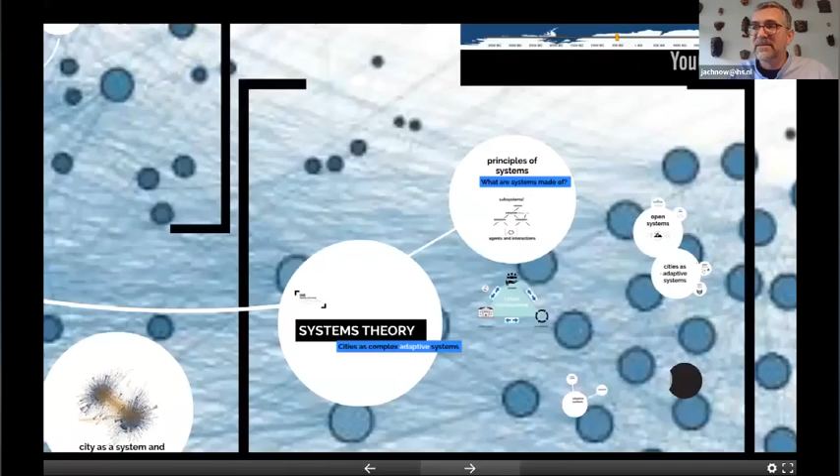So if you think about development from the perspective of what Mohanty was asking for, of having values, institutions, and processes working with each other and having an interaction with each other, you have to first state that there is a multitude of institutions. So maybe not each and every institution at this moment is able to respond, which makes it more difficult to prioritize or to have our actions clearly outlined, and more even in terms of values and our policy interventions.

We have now, and this is the only moment when we can really discuss this openly, to decide which one is more important. We've seen that economic growth has been prioritized over green development, green infrastructure, ecological and environmental features in the city. Now we have to see if economic growth even outweighs the importance of social values. If this would be the fact, we would have a severe problem.

But maybe we can state that now, when social development is at stake versus environmental issues, resilience issues, which one do we give preference? Is humanity really free of being environmental bound? Can we be without nature? No, we cannot. So I think the only way to get this balance right is to think about nature, environmental, and resilient features have to be more important to us than economic features, while social development and social features are on top of it. They are integrative to our...

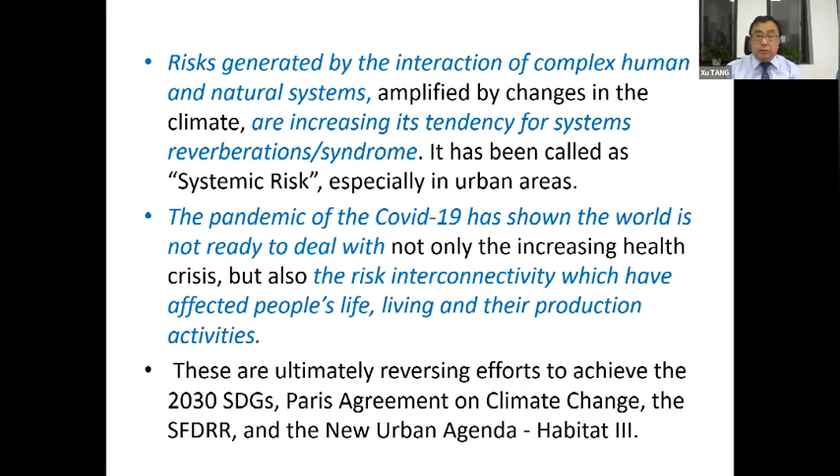However, the COVID-19 pandemic has shown the world is not ready to deal with such risk interconnectivity, which have affected people's life, living, and production activity. You can also find the second wave of the pandemic happened, showing the ineffective dealing with this sort of risk interconnectivity.

So what does the resilient city look like, especially in a new era? I think it might be appropriate for both physical and virtual infrastructure and capacity to be more prepared for the physical, social, and economic challenges in the city.

To address this challenge, it calls for urban readiness on a systematic level - reverberations, I call this a syndrome of risk interconnectivity - and an adaptation and emergency response. We call it a climate emergency right now.

Here are some points for building urban resilience, not limited to what I will mention, including science-based, sustained, and integrated urban service approaches. In order to save time, I will provide more detailed description in a summary part about some points here.

But I will mostly focus on some best practices and experience already being developed and implemented at a global level, national level, and community level.

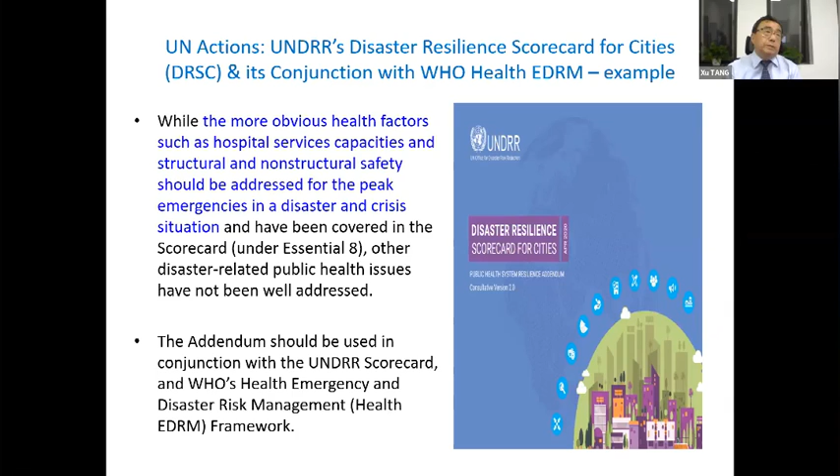For example, as the UN action call for integrated sustained planning for urban health requested by WHO, World Health Organization. And also UNDRR developed a disaster resilience scorecard for cities together with WHO, especially its health emergency disaster risk management component.

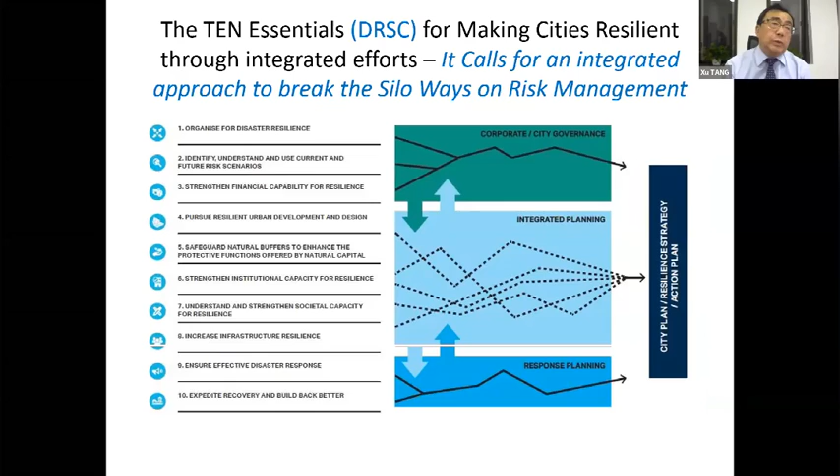So this disaster resilience scorecard for cities calls for an integrated approach to break silos in risk management, including, especially, the component of corporate city governance, integrated planning, and response planning, etc.

Other achievements or progress made by international efforts include, for example, the International Network for Multi-Hazard Early Warning Systems, supported by 21 international organizations, established in March 2015 during the Third World Conference on Disaster Risk Reduction in Sendai, Japan. This network is a sort of global framework which can provide support to guide the development and implementation of integrated urban services, as an example.

Regarding the health effects of climate change, which have already been fully identified by IPCC through its assessment report, especially its fourth assessment report, chapter 8, health related.

The science-based service related to weather and environmental sensitive disease and its vulnerability has been identified, and also the tools and systems have been developed at global level, regional level, and national level.

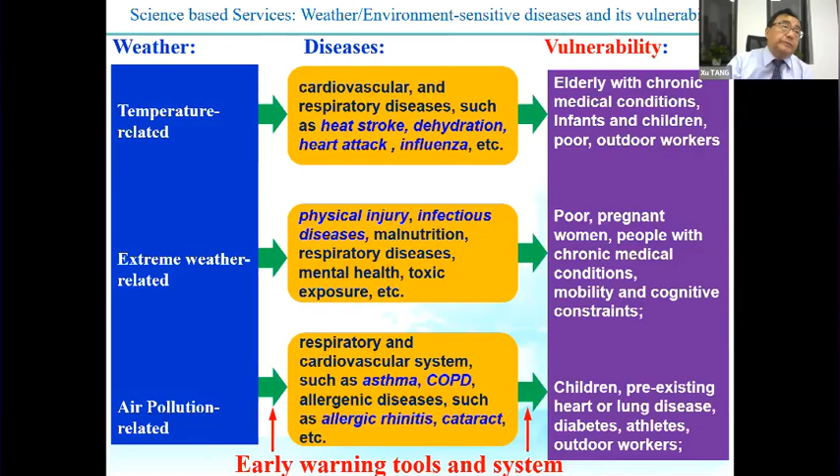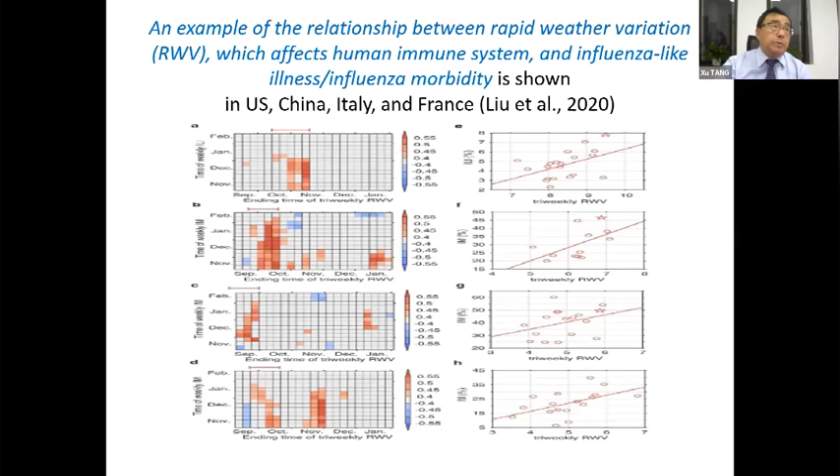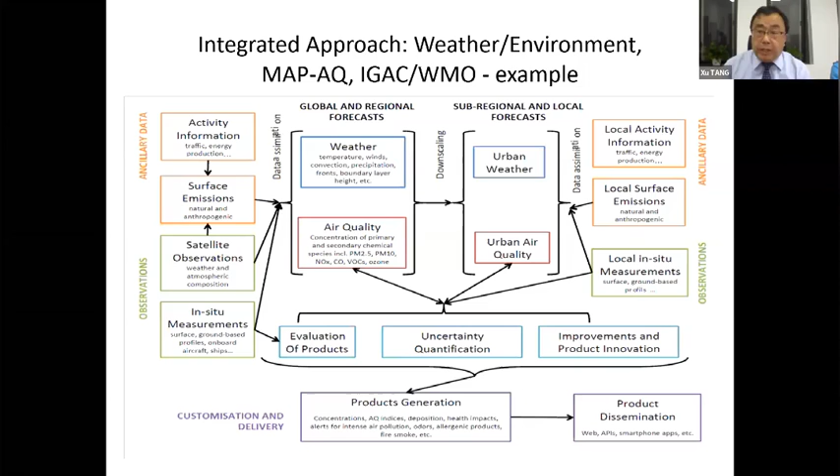Integrated approaches have been developed and demonstrated by relevant international programs, such as weather and environmental related impact-based forecasting and integrated services developed by MAP-AQ and IGAC as an example, and also integrated perspective approaches developed by several international organizations for the driver to societal impact on climate and health.

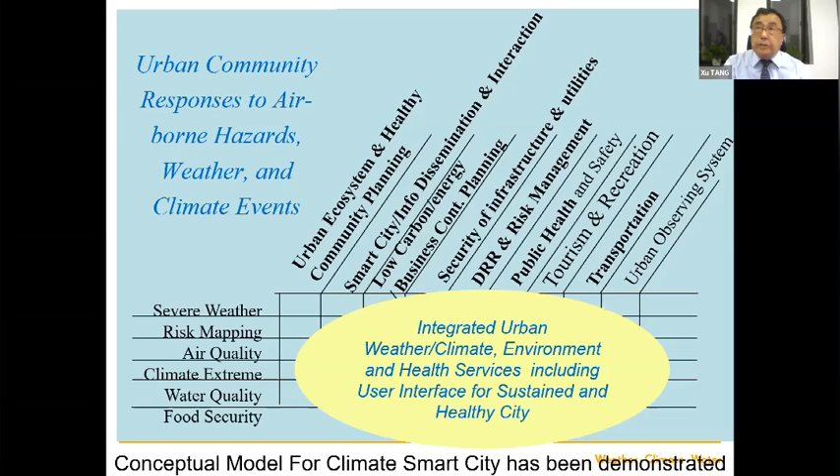So the conceptual model for climate smart city has been demonstrated, including user interface for sustained and healthy city. This concept model has already been implemented at the global level by different international programs and at the national level.

The user interface platform has developed a global framework on climate services at the global level, regional level, and national level, which has been identified and demonstrated.

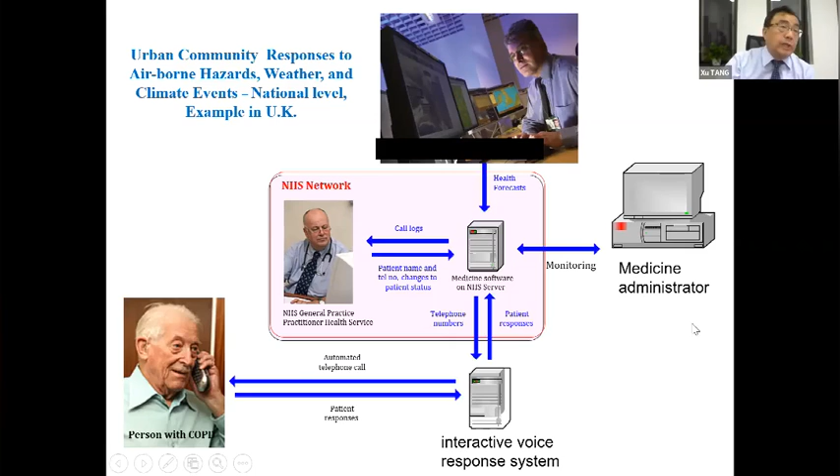Here's one example to show at the national level, using the UK as an example, showing urban community response to airborne hazards and weather climate events, demonstrating joint efforts between the National Weather Service and the National Health Service Authority to interact with vulnerable groups.

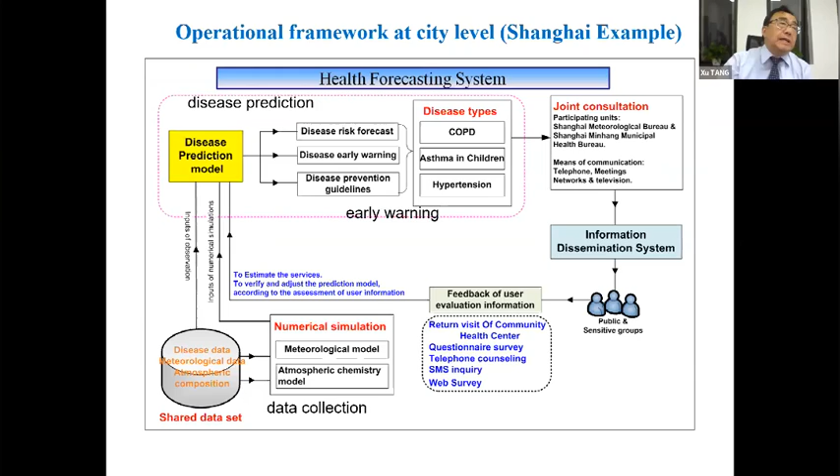The operational framework at city level, using Shanghai as an example, developed an integrated impact-based forecasting system, and its subsystem to show the impact on health.

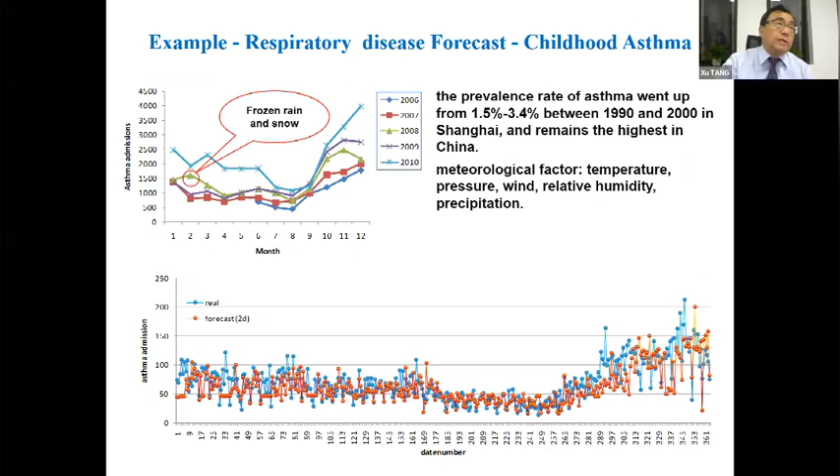For example, heat waves, influenza forecasting, children's asthma, the impact to forecasting, and COPD for the elder group, and bacterial food poisoning warning systems and tools. Capacity development and symposiums have been regularly organized to exchange ideas and achievements.

So here's the summary. At the policy level, I think it's necessary to develop a policy on planning and designing for controlling urban scale and population density.

Alexander just pointed this out in his previous introduction, and a policy for urban redundancy and flexibility and durability of the urban life safety and critical infrastructure system.

And also the intercity co-design and co-planning for coordinated action are needed. The policy on enhancing effectiveness, efficiency, and safety of the urban technical and industrial system and process are also needed to increase urban energy efficiency and reduce urban environmental footprint.

And also the policy on promoting sustained urban healthy lifestyle and prioritizing walking as the preferred mode of travel, and a strong risk settlement mechanism for the most vulnerable group are also needed. Regarding the technical aspects, I think it's necessary to develop a strong digital networking supporting

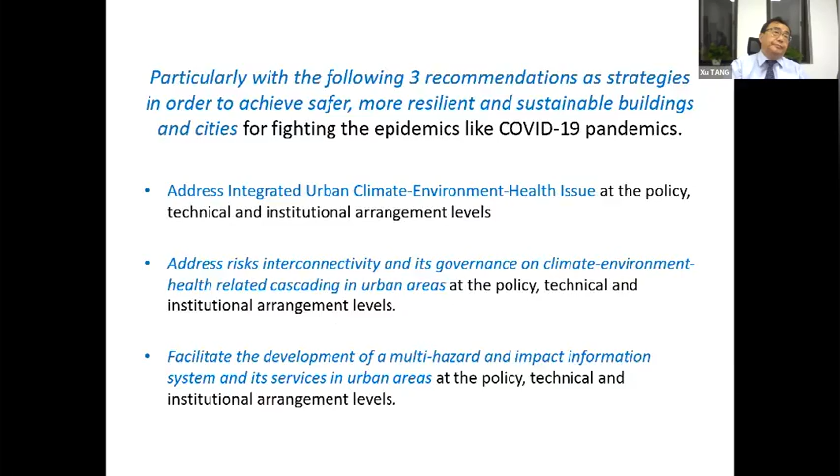Thank you so much, Professor Tang, for very clearly outlining the importance of integrated urban services, the science-based sustained integrated urban services to deal concurrently with health epidemics like COVID-19, climate, and natural disasters. And we have also outlined a number of areas for policy interventions, technological interventions, and institutional arrangements.

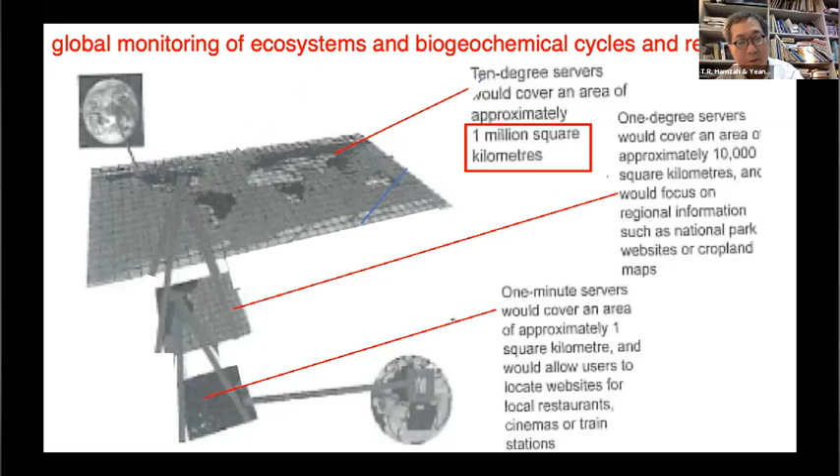Now, biointegration has to do with how we bring different parts of the systems together. My contention is that everything depends on effective biointegration.

If we're able to biointegrate our human society and its systems with the natural systems in a seamless and benign way, there won't be any environmental impacts. And so we must learn how to biointegrate everything that we make, everything that we do, and integrate our technology with the natural environment in a benign way.

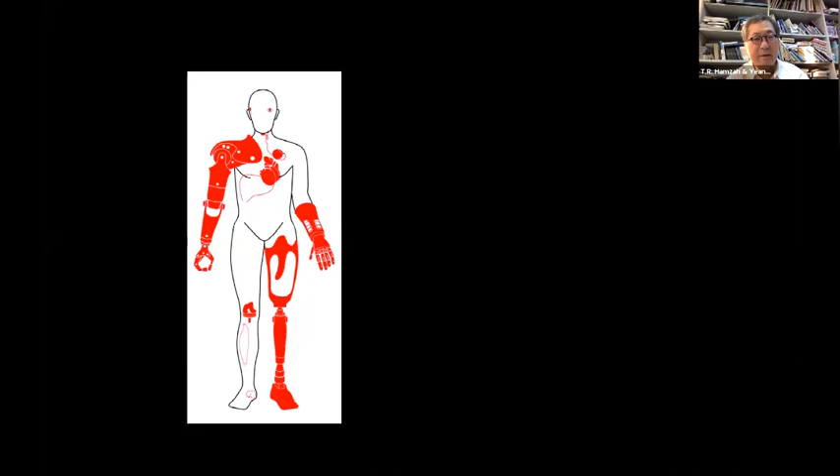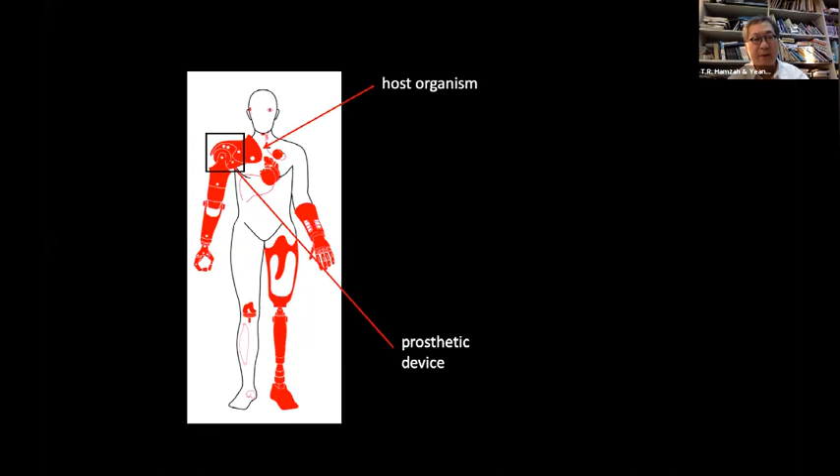Now, this is a human being with prosthetic devices. There's a prosthetic arm, he has a prosthetic heart, a prosthetic hand, a prosthetic thigh, a prosthetic knee. Now, the principle of prosthesis is that there is a host organism, which is the human body, and the prosthetic device is the artificial thing that we attach to it.

And then everything depends on effective biointegration. Now, by analogy, our biosphere, our biogeochemical cycles, our natural systems is the host organism. The prosthetic devices are our built system, the technology, the artifacts, the semi-artifacts like food, everything that we make and do as human beings.

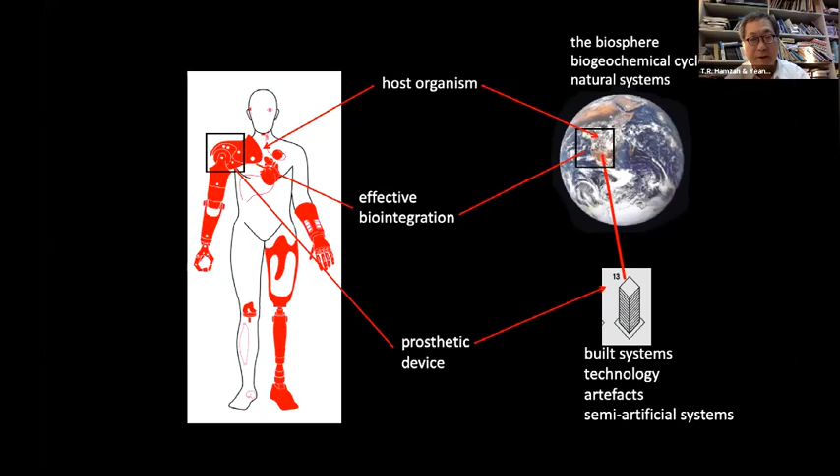And so if we're able to achieve effective biointegration, there will be no environmental consequences, no environmental devastation, no environmental impacts. And so biointegration is absolutely important.

And to me, there are two ways of biointegration. One is physical, which is almost putting something one to the other. The other is systemic, where everything is linked and connected as a whole.

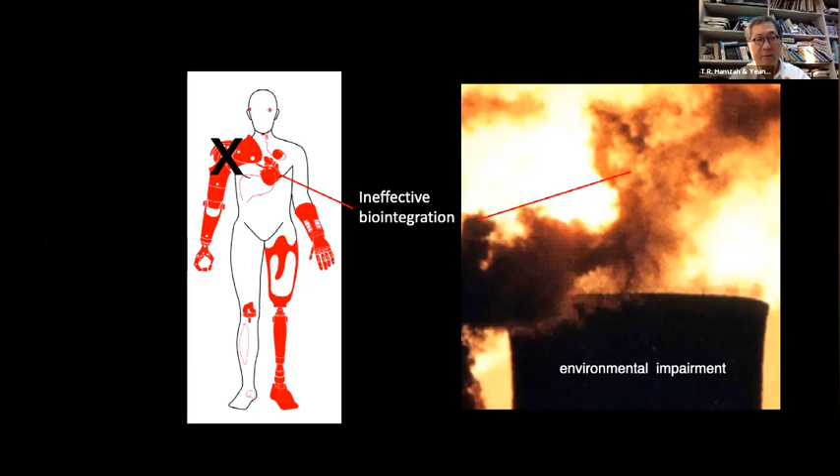This is the cause of environmental impairment: ineffective biointegration, for instance in our energy production, which creates emissions. We think everything we make will go somewhere, but there's no somewhere, because our planet is a closed system. This ineffective biointegration of energy creation and emissions, not integrated properly, is the cause of climate change and everything related to it, like poor health, rising sea levels, and temperature changes.

Systemic biointegration is not easy to achieve. If you look at this girl with an artificial arm, there are issues integrating the arm with the whole body's nervous system and cardiovascular system. There are dangers of connecting something artificial to something organic, like the risk of getting septic. We're a long way from achieving effective biointegration, but this is where we must focus our attention.

If we want resilient cities, cities free from diseases and COVID and so forth, we have to have effective biointegration.

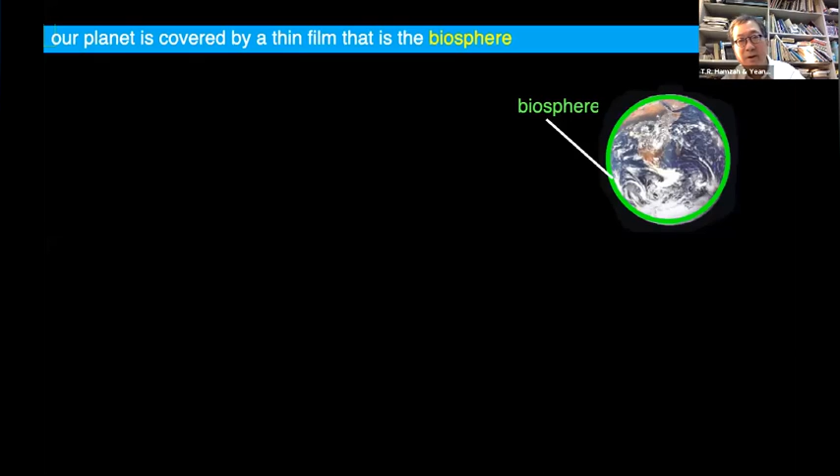The next is ecocentricity. The contention is that all action and design must be based on the science of ecology, because we cannot base it just on energy, or on looking at waste, or incremental micro aspects, but must look at it as a whole. That's what ecology does. Ecology looks at the planet as a whole, looks at localities as a whole, looks at the organic and inorganic as a whole, the biotic and abiotic as a whole. Ecology sees the Earth as covered by this thin film called the biosphere.

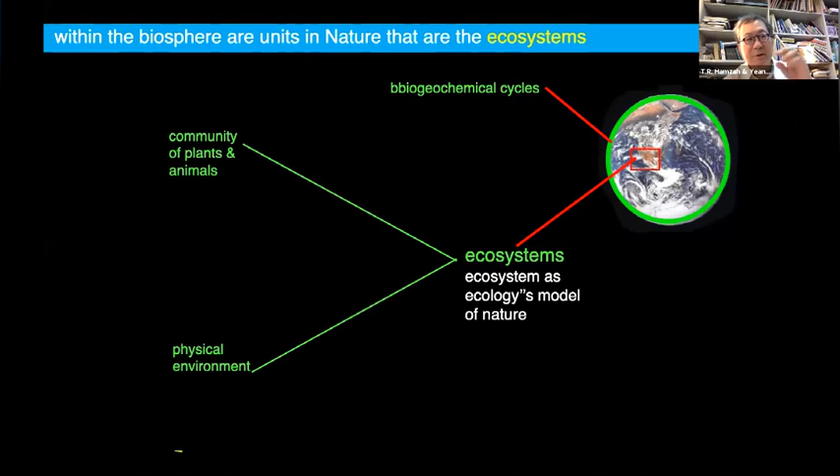The biosphere consists of ecosystems, which some ecologists define as the ecologists' model of nature, because an ecosystem is both communities of plants and animals and the physical environment interacting as a whole.

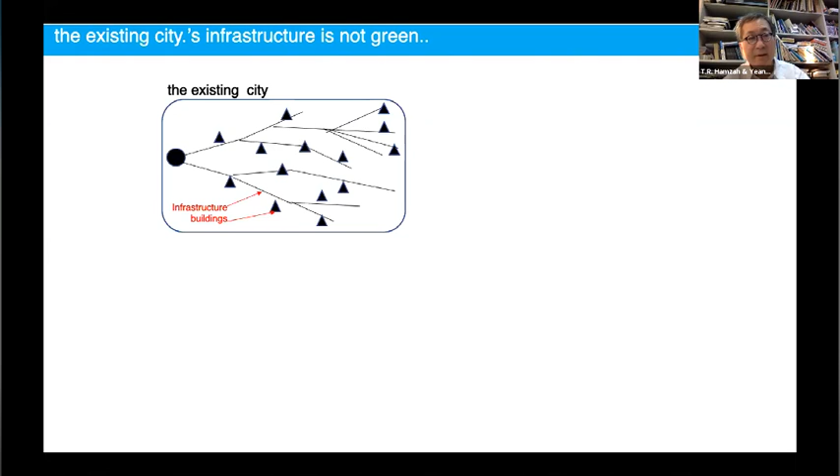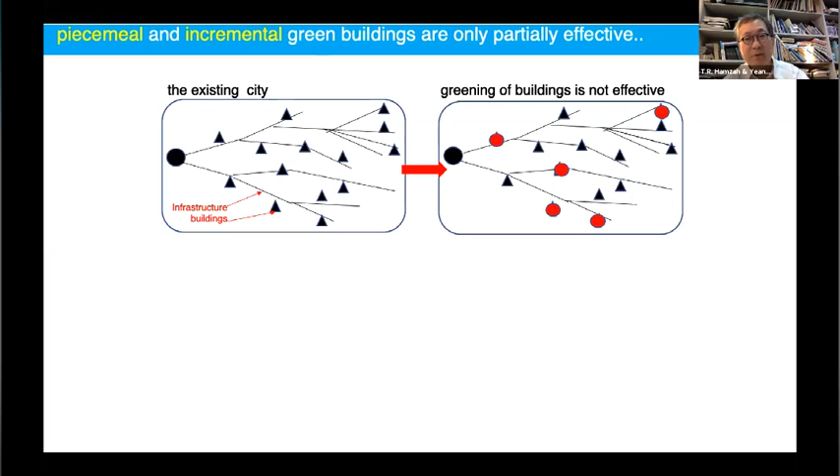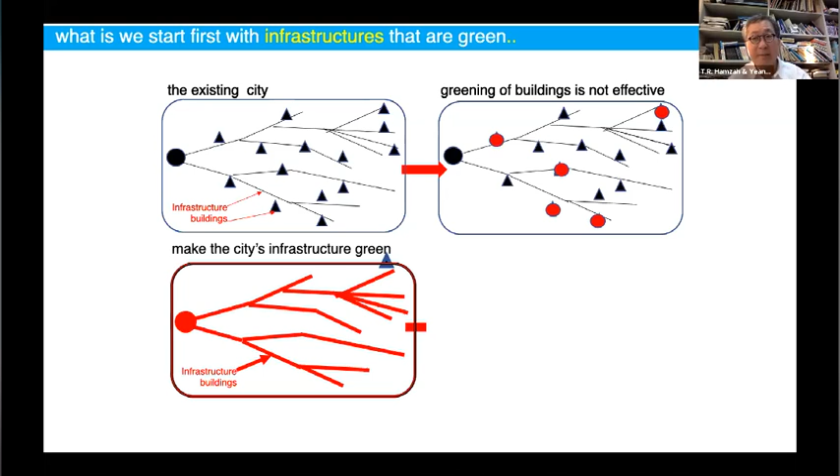A lot of people talk about designing sustainable buildings, sustainable architecture, sustainable structures, but I contend that sustainability starts with designing the infrastructure. A city has infrastructure with buildings attached to it, and then architects try to design sustainable and green buildings scattered throughout the city. But we should start with the infrastructure. What's the point of designing green buildings when the infrastructure itself is not green? The principle is that we should design sustainable buildings starting with sustainable infrastructure, so that whatever we build makes the city sustainable.

My contention is that we should not think about sustainability in terms of buildings, but think of sustainable infrastructure as the sustainable built environment, because if the infrastructure is green, if the energy source is green, then everything else becomes green. But if the energy source pollutes the environment while you're making green buildings, it's a totally useless exercise, making nonsense of designing for a sustainable future.

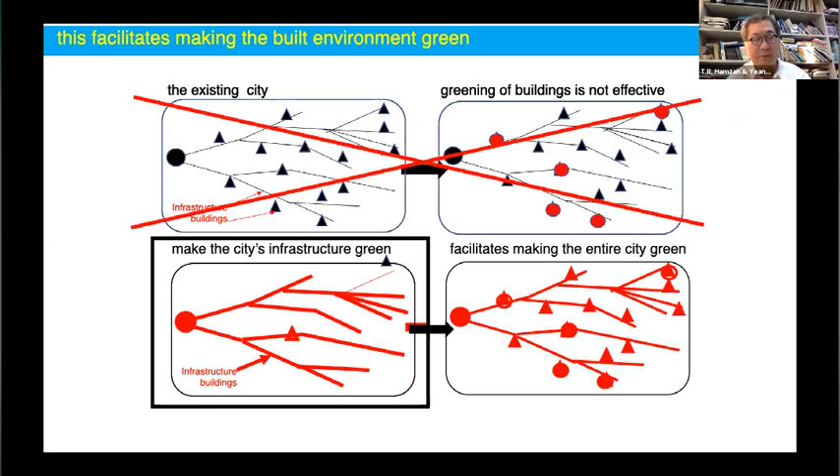The water supply should be green—not taken from groundwater, but from natural sources. The sewage system should be green. The energy system should be green. The IT system should be green. So ecological design for a sustainable future, a resilient future, sustainable cities, should start from sustainable infrastructure.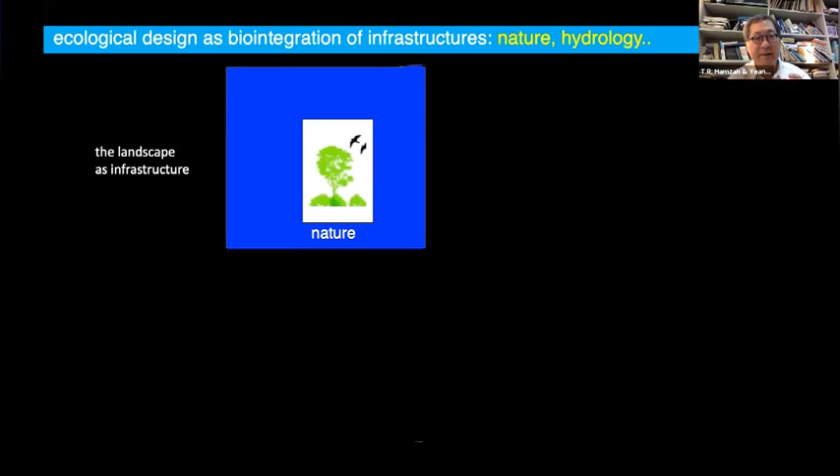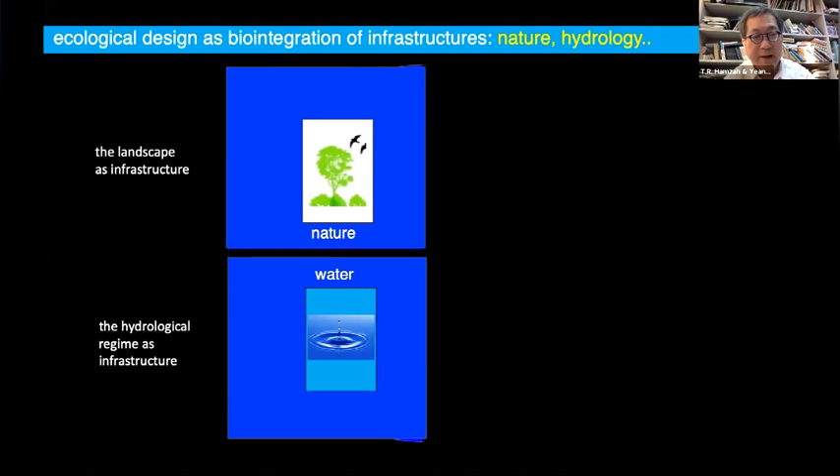What is sustainable infrastructure? I have four aspects that constitute it. The first is nature itself—nature is the base, nature is the landscape as infrastructure. The second is water. Even though water is part of natural systems, water has its own hydrological cycles, and on top of that, human society has its own hydrological cycle.

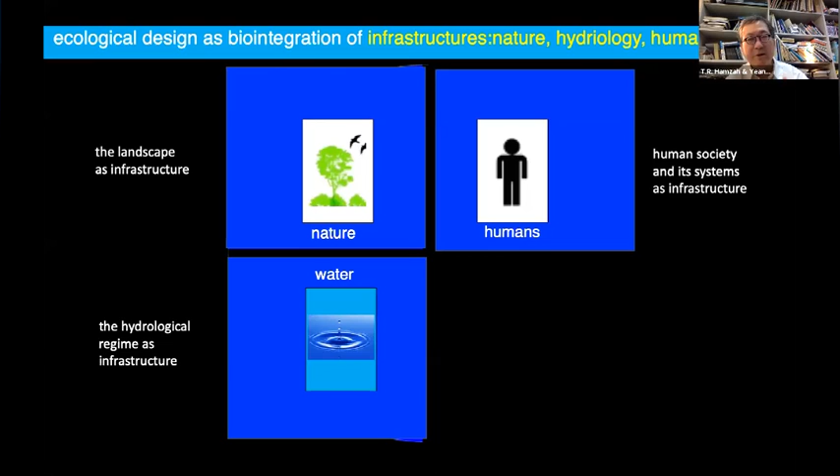Human society means its social systems, economic systems, political systems, institutional systems, education systems—that is human society's infrastructure. And then there are the things we make; we as a species make more things than any other species in nature. These are what I call the built environment. Sustainability is how we bring all these together into a seamless and benign whole. That, to me, is the principle of sustainable design: how to integrate nature as infrastructure, water infrastructure, human society's infrastructure, the built environment, and everything we make—our technology—as infrastructure.

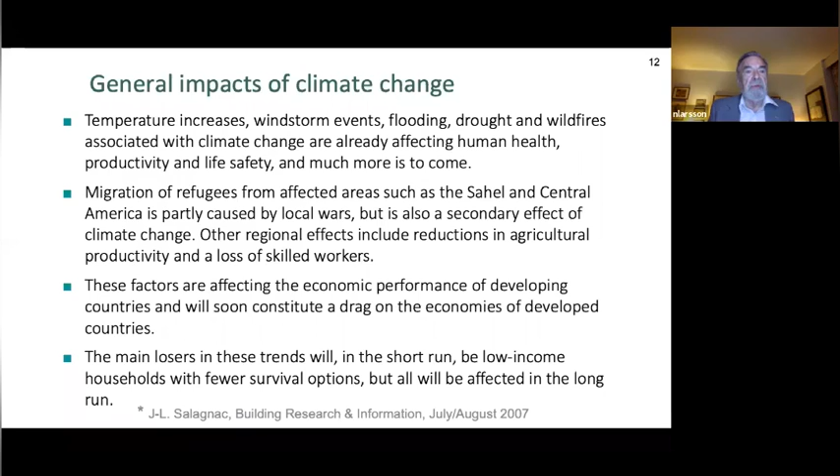Obviously, this is easier said than done, and that is the challenge we must soon address, which could create a drag on the economies of developed countries. The main losers in these trends will, in the short run, be low-income households that have fewer survival options, but everyone will be affected in the long run.

So we have some proposed climate actions, and these are not surprising, and I'll let you look at the details in the file, but we have to protect critical facilities and infrastructure, even if they don't live up to Dr. Yeang's goal of having them compatible with ecological systems. But the ones we've got, we have to protect.

We have to establish multi-stakeholder climate action authorities at national and local levels to establish relevant regulations and guidelines. We have to adapt global goals to local conditions, because unless you have local elites backing plans, nothing will happen.

Support a shift from private to public transport. Neighborhood action strategies. Adjust value-added tax rates to provide incentives for renovation and disincentives for new construction. Existing buildings represent about 95 to 98% of the total building stock at any point, so we have to really focus on them.

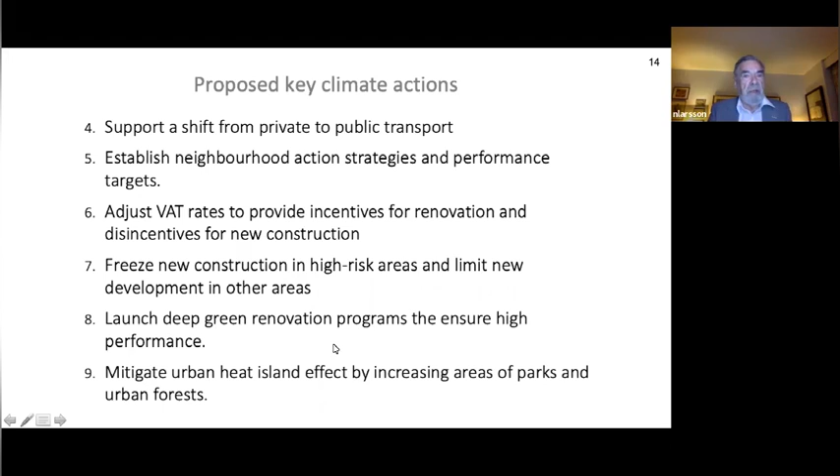We have to freeze new construction in high-risk areas. We have to launch deep green renovation programs. We have to mitigate urban heat island effects by increasing areas of parks and urban forests.

Short-term housing for population groups relocated, refuge centers in low-income neighborhoods during climate emergencies, urban agriculture to reduce transport emissions and to increase neighborhood access to fresh produce.

Introduce incentives to move rapidly towards zero use of fossil fuels. Thermal, solar, gray water system synergies in groups of buildings. It's not just neighborhoods and single buildings, there are clusters of buildings where you can get efficiency improvements.

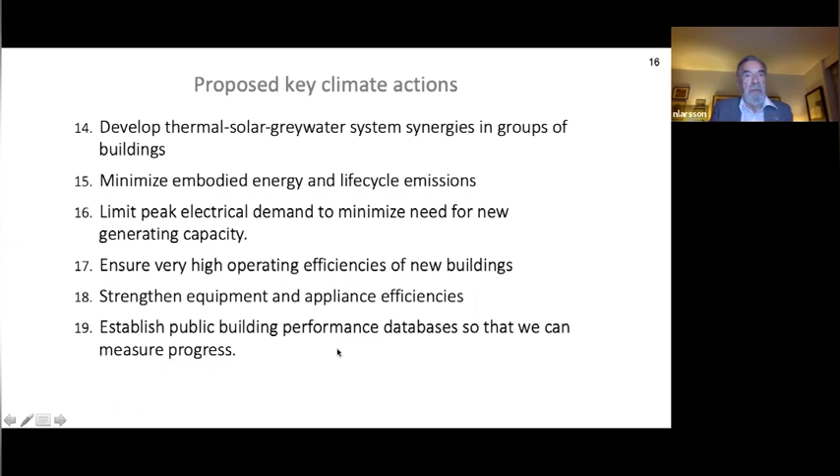Minimize embodied energy and emissions, limit peak electrical demand so we don't have to build new generating capacity, very high operating efficiencies of new buildings, strengthen equipment and appliance efficiencies, and establish public building performance databases so that we can measure progress or lack of it.

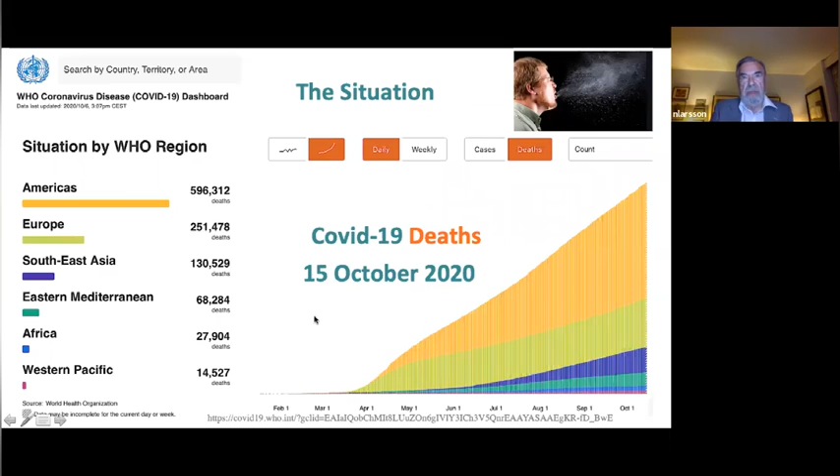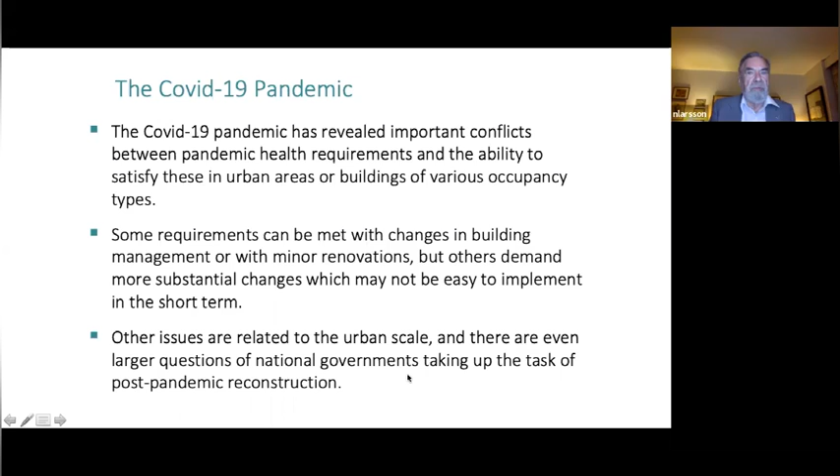The pandemic has revealed important conflicts between health requirements and the ability to satisfy these in urban areas or buildings of various types. Some requirements can be met with changes in management or minor renovations, but others demand more substantial changes, which may not be easy to implement in the short term. Other issues are related to urban scale, and there are even larger questions of national governments taking up the task of post-pandemic reconstruction.

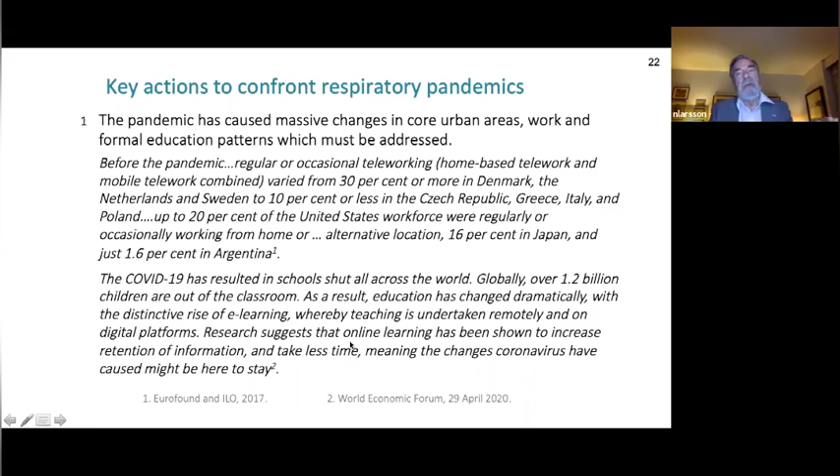We have seen a massive change in work patterns. Teleworking, for example, has increased enormously, and also distance learning has increased. But there's a forced increase here. We reached a tipping point in terms of using internet and remote systems to do our work and learning.

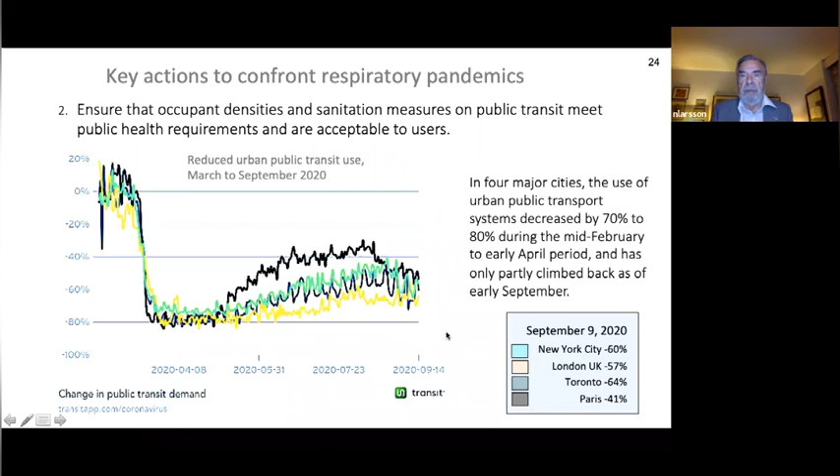One thing that happened was that urban public transit use declined rapidly. You can see here we had in New York City, London, Toronto, and Paris, they all declined. I took this on September 9th, but I don't think it's come up very much since then. So people stayed away from public transit.

So we have to make use of urban areas and buildings made redundant by the pandemic. We can't just leave unused office buildings or unused conference centers to rot over time. We have to convert them to new uses and make use of them.

We have to launch major low-income housing and commercial retail renovation programs, partially because we need those kinds of uses, but also social equity and economic recovery measures. Training for doing renovation, for example, for low-income people can be very important to help them get a leg up on the economic ladder. We have to provide all new dwelling units with private outdoor space,

gardens or courts or balconies. We have to adjust occupant densities in non-residential buildings to support increased distancing and limits on occupant density. In large apartment or mixed-use buildings, we should provide small apartment for isolation of visitors. We have to provide neighborhood fever clinics, which follows the Chinese model, and residential facilities to meet short-term isolation requirements.

In long-term care residences.

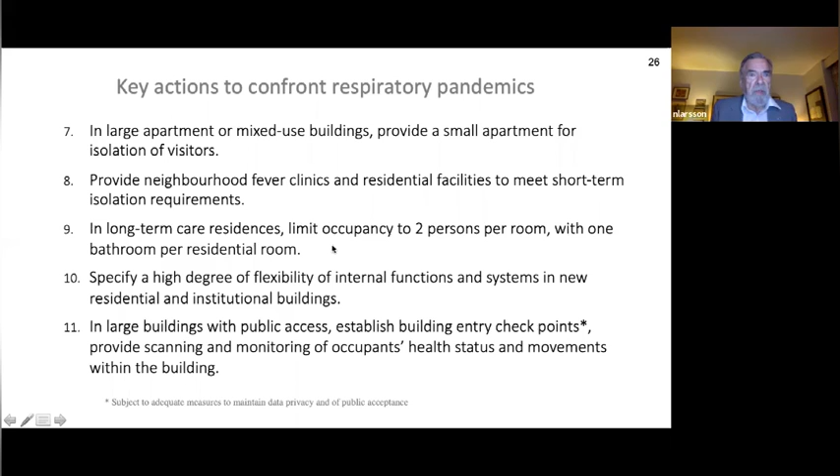I don't think I've had my 10 minutes yet, but I will skip over this and just mention that there has been a paper by central bank officials and experts stating that we need, and we can have, governments intervene decisively and perhaps help launch such an initiative in a developing country if international funding support can be found.

Thank you so much, Mr. Larsson, for outlining a number of integrated actions in built environments to confront climate change and COVID-19 simultaneously, and how they create synergy between the set of actions in achieving the resilience of our cities.

The next presentation is by Honorable Vice Mayor Mr. Zhang Li, City of Lanxi, Zhejiang Province, China. Honorable Vice Mayor.